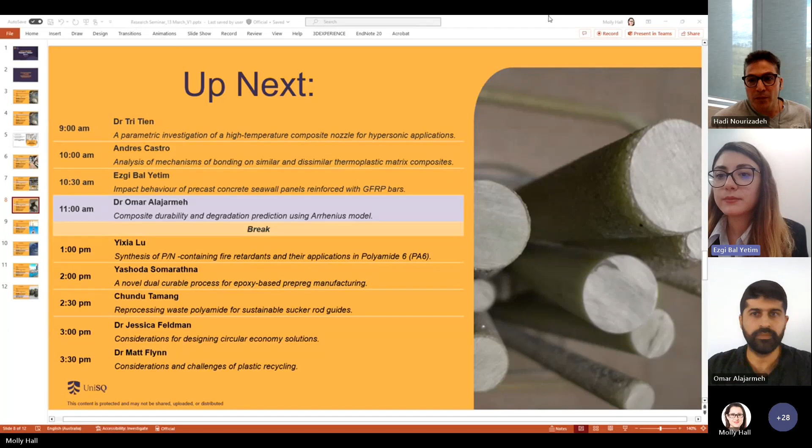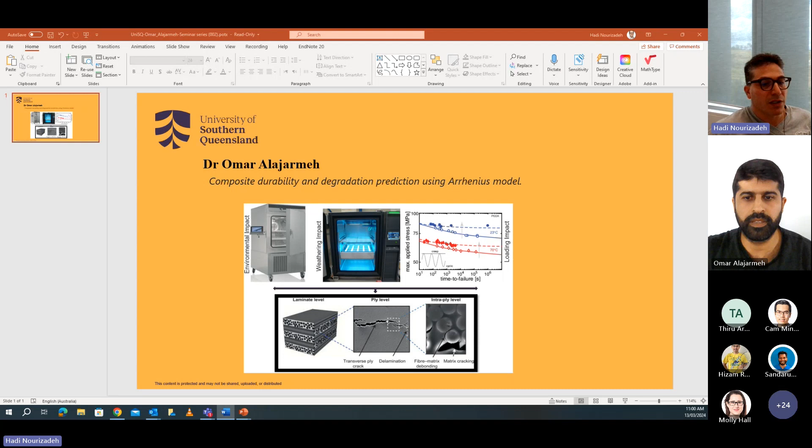Next presenter is Dr. Omar Alajarmeh. The title of the presentation is Composite Durability and Degradation Prediction using Arrhenius model. So Dr. Omar is a senior researcher and teaching fellow specializing in fiber composite manufacturing and their applications, including their short and long-term behavior. So Omar, the floor is for you.

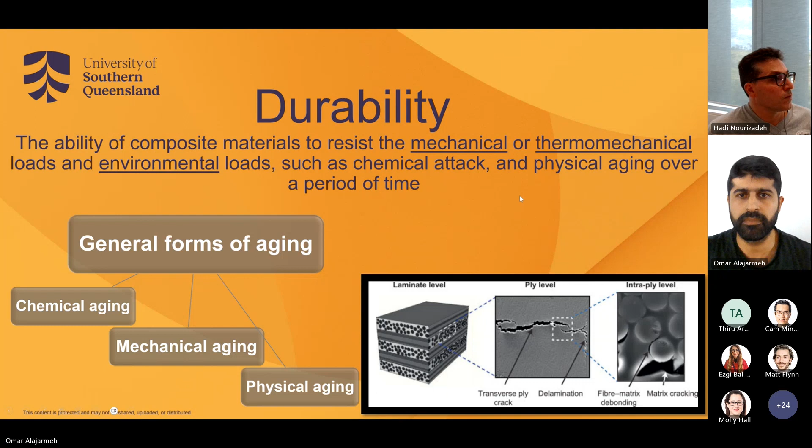Starting from the first factor, which is a critical factor of aging, we are talking about chemical aging. Chemical aging occurs after long aging duration, causing decrement in properties of the polymer and changes in the chain and cross-linking of the polymer. And that is changing the whole properties of the polymer.

And as forms of chemical aging, you can have thermal aging, thermo-oxidization, and hydrolytic aging. For thermal aging, what we mean is molecular deterioration coming from overheating. And by overheating we mean a temperature that is close to TG or over that.

So what are the features that you can see from thermal aging? One is reduction in ductility and seeing some brittleness in the polymer. The second thing is a color change, so you will start to see a yellowish side of the polymer. Cracking, micro cracking, and debonding between the fibers and the polymer. And you can have a reduction in the physical properties, like increase in the moisture absorption.

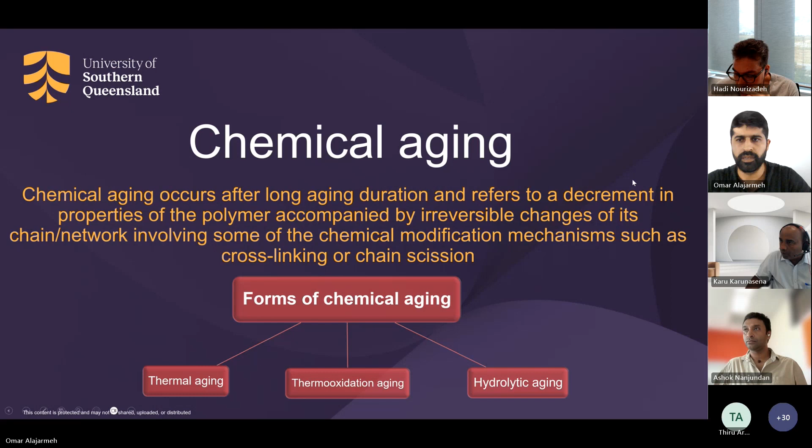Going for physical aging, again, it's time dependent. All of them are time-dependent aging, but it affects more amorphous and semi-crystalline polymers with no modification of the polymer chemical structure, unlike chemical aging. General forms of physical aging are hydrothermal, or hygrothermal as some people call it, and weathering aging. Weathering aging is mainly the UV.

For hydrothermal, it is a combined process of subjecting the sample or the polymer to temperature as well as moisture at the same time. And that temperature should be less than TG, to the level that the temperature will not intercept with the thermal aging.

And again, what is the feature of the hygrothermal or hydrothermal aging? You will see a little bit of swelling in the polymer, a change in the moisture absorption or the absorption capacity, and something called the plasticization of the polymer, where the water is infused in the polymer and the temperature increases the infusion of the water into the polymer.

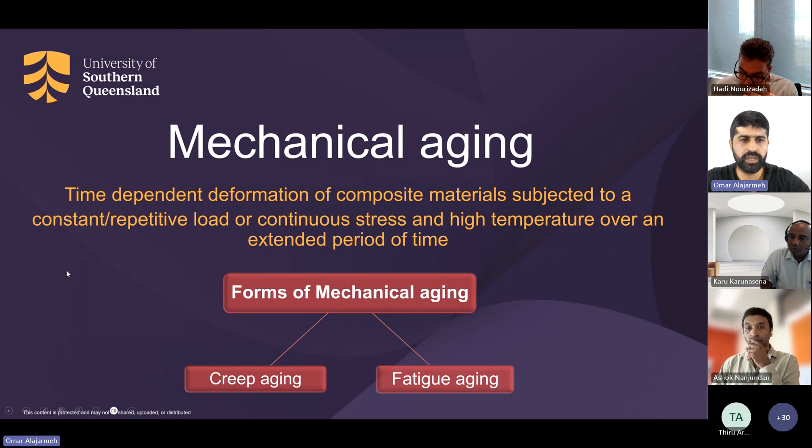So just to focus more on accelerated aging coming from the environmental effect, which is more about the physical aging. A general question: how can we make those accelerated aging, or how can I simulate the polymer subjected to aging in reality, how can I simulate that in the lab?

There are some points we use in the lab to simulate the exact environmental impact in reality. One of the tests we adopt is increasing the exposure temperature to accelerate the water diffusion, and this is hygrothermal. Increasing the concentration of the chemical or compound that helps degrade the polymers is more about alkaline solutions and acid solutions.

Extreme temperature cycling to induce cracking and delamination is more about freezing and thawing for environments that have high and low temperatures. We have wavelength to accelerate photodegradation, which is more about UV. So you can control the UV energy using some lamps and give different energy waves for the polymer to react or accelerate the degradation. Increase the humidity, increase loads, and condensation cycles, which is more about mechanical testing.

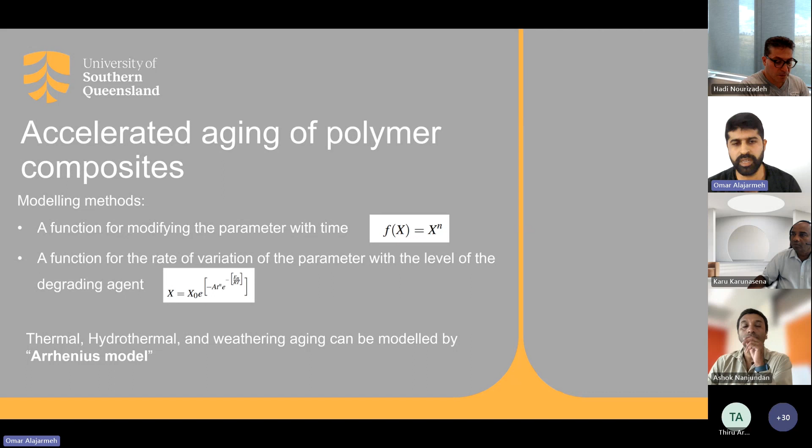However, if you are looking for a function for the rate of variation of the parameter with a level of degrading agent, this is when we look at physical and chemical aging. So we need temperature, time with the temperature, and something called activation energy, which comes after this slide. So we are focusing more on the Arrhenius model as a model that can describe some of the thermal, hygrothermal, and weathering aging of composite material.

So what's the Arrhenius model? It's a formula for the temperature dependence of reaction rates. You have a reaction rate, and the temperature is one of the controllers of that reaction rate. As you see from the formula, K is the reaction rate, A is a constant based on the material, and you have exponential of minus EA, which is the activation energy, R is the gas constant, 8.314, and T is the temperature or the service temperature.

If you take the logarithm of that equation, you end up with a linear equation: log 1 over K, which is the time, and minus EA over R, with the activation energy playing as a slope. Imagine that equation as y equals ax plus b. So the slope is the activation energy, which is what we look for when we analyze how the composite is degrading and what the degradation rate of the composite is.

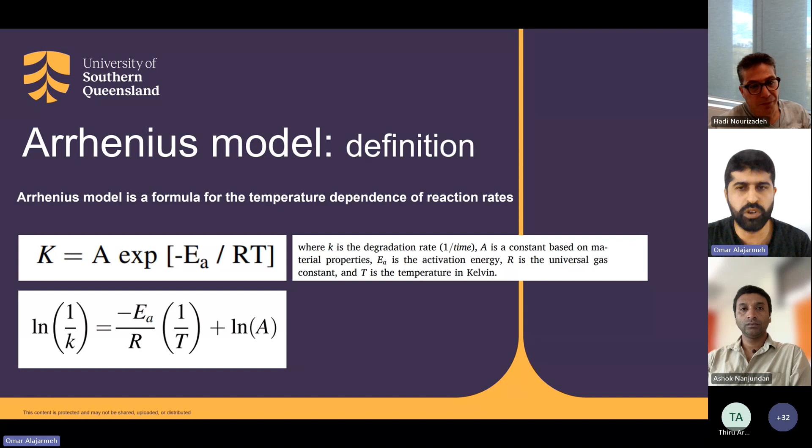I'll go through an example which makes it easy and quick to understand. It's about GFRP in alkaline solution.

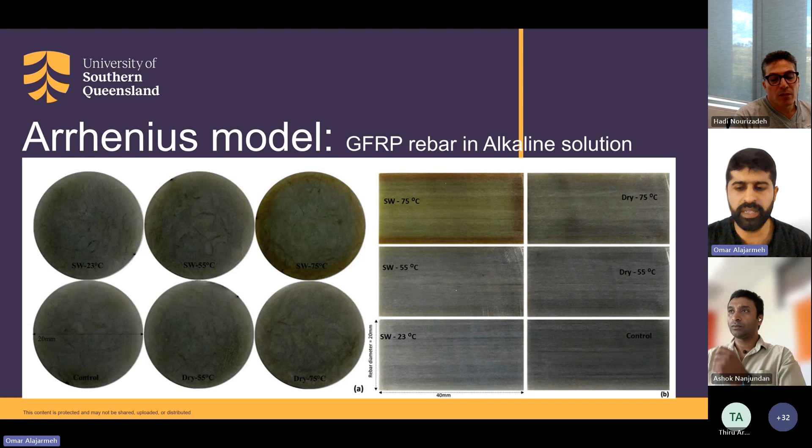So GFRP, what we have done previously, we have taken a reinforcing bar, GFRP bar, and we cut that into small length. And the target for us was to test that under interlaminar shear test, which is a 3-point bending. So what we have done, we put that bar in alkaline solution for different durations and different temperatures.

So we have put that in 28 days, 56 days, and 112 days. In room temperature, 23, in 60 degrees, in 80 degrees. And we start testing those bars after these points. We have selected 3 to 5 bars to be tested to represent one dot point.

So the reference is tested at the beginning, and then we start to notice that there is a reduction in the strength with the period and reduction in the strength when we increase the temperature. And here on the right hand side, you will see strength retention. Strength retention means we have divided these values in the table on the reference strength of those bars, and we have seen that there is a logarithmic relationship of these test results with the time.

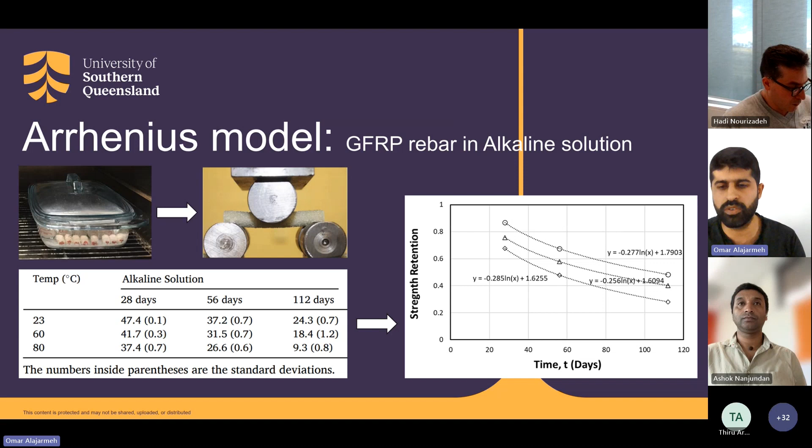So we pick up all of these three equations, each one related to a different temperature. So for the first equation, we reverse the calculation to say, how many days I need to reach 90% strength retention, and how many days I need to reach 80% and 70% and 60%. Same as for the other relationships, which is at 60 and 80.

So the outcome of that was plotted in X and Y according to the equation that we have seen two slides before, which is the linear equation, expressing activation energy as the slope of the linear line. So from plotting these relationships, we have found that activation energy is the slope of those numbers, and we got that averaged at 2.26. So different material, different activation energy.

So once we got the activation energy, we now look to have the shift factor. Shift factor means if your material is tested at room temperature, to degrade, for example, polymer, to reach 60% of the original strength at room temperature, you might need 1 year. But to accelerate that degradation, you need to apply higher energy or higher temperature to accelerate that process. And this is what we call time shift factor, TSF.

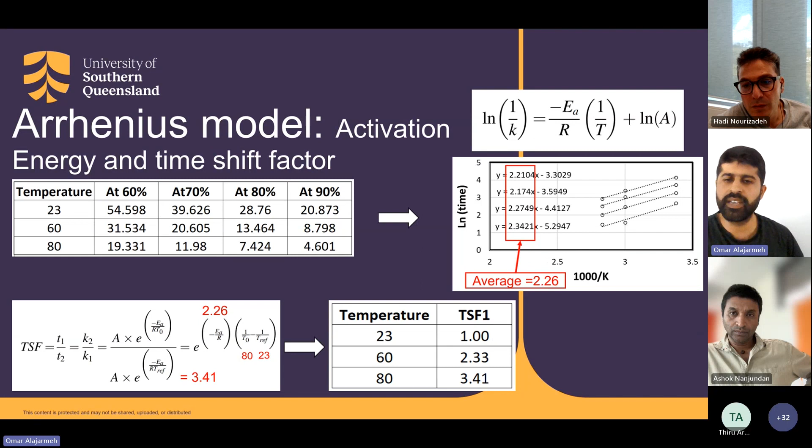So once we have that time shift factor, we go again to the table that we previously constructed, and we multiplied all the other temperatures with their relative time shift factor. And this process is called developing a master curve. A master curve is a curve that has a lot of representative dot points, to get a reliable relationship that can give me an indication on the service life of the polymer.

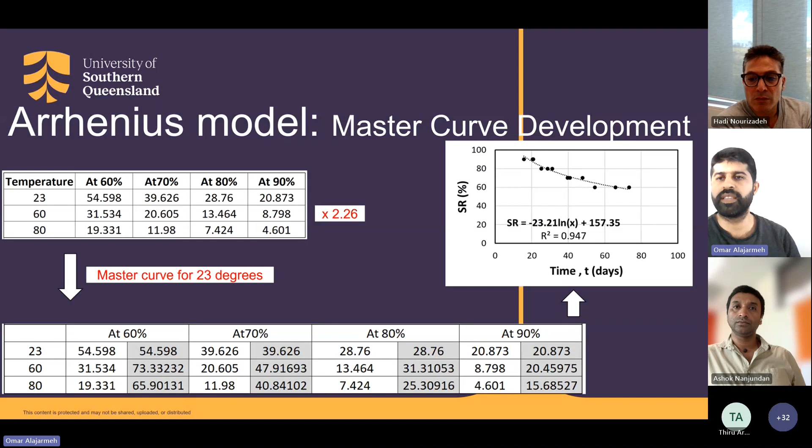So once I have that master curve, I take the function that I'm getting from the regression of those dot points, and I correlate it into a service life up to the target years that you are looking for. For example, in our project, it was 100-year service life. And how we do that, you take the function, you start to change the x values to get the y values. So the strength retention in percentage after 100 years, in our case, was around 52%.

So that is giving solid evidence on how those types of polymers are reacting against environmental agents. And this is one example; you can actually do an infinite number of other examples based on different polymer composition and even different loading configuration. The example that we have given here is about interlaminar shear strength, but you can repeat the same thing for flexure, compression, transverse shear, and tensile as well.